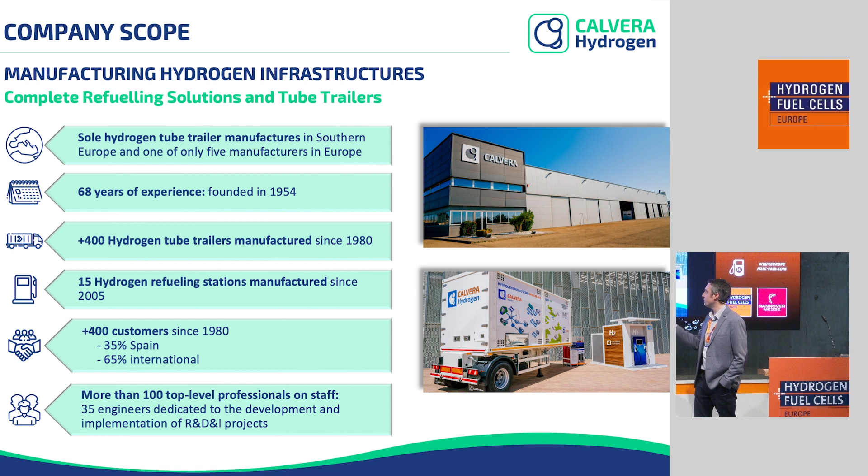I will speak about hydrogen refueling stations after. In Calvera, quality and safety are very important, and we've got engineering teams - more than 35 engineers in Calvera to dimension, design, and build our equipment.

So let's start to speak about storage first. In Calvera, we work within a hydrogen hub - you've got the production and you've got the off-taker. In Calvera, we manufacture equipment just after the production. Once the hydrogen molecule is manufactured and produced, we manufacture equipment to store, transport, and distribute hydrogen. Regarding storage, we manufacture racks, blocks, and bundles for stationary storage, in vertical or horizontal configurations.

In the market, we manufacture storage at 200 bar, 300 bar, 500 bar, 900 bar. These are, let's say, standard pressures, because we can also offer 350 bar, 700 bar, whatever you want. But there are common pressures on the market like 200, 300, 500, and 900 bar.

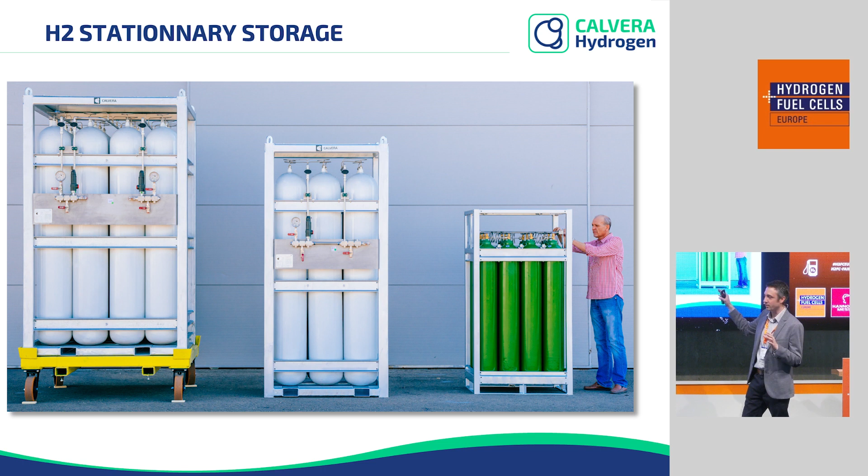So we manufacture on a vertical way - when you see vertical cylinders, it's because you need less footprint and you only need a small capacity of storage, so we use the vertical position. But when you need more capacity to be stored, we will use a horizontal way to store the hydrogen, with big cylinders or tube cylinders. It can be containerized, but usually the storage is not containerized - you can see it outside, in a frame.

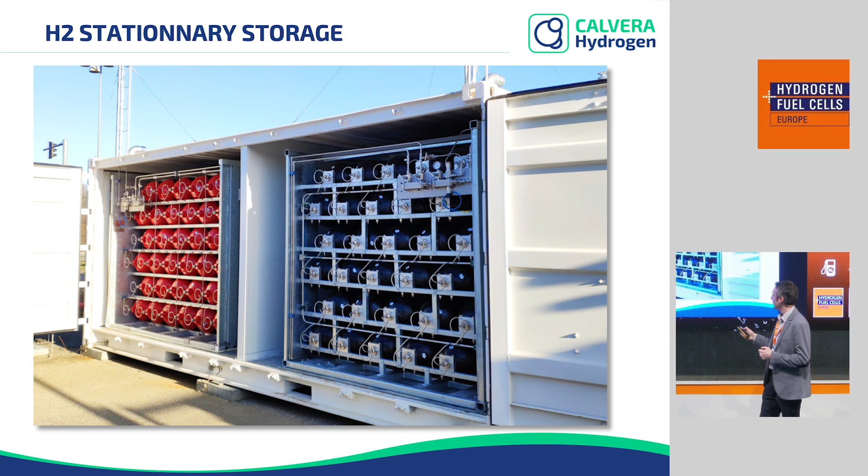So this is about storage. Let's speak about transport. There are many equipments to transport hydrogen. You've got bundles at 200 bar, 300 bar, 450 bar. Usually you will find more 200 bar bundles on the market, but we can manufacture with these three working pressures. The bundle is mainly used for industrial markets, when you need to transport very little hydrogen - for example, between 5 kilo and 18 kilo, you will use a bundle to transport it.

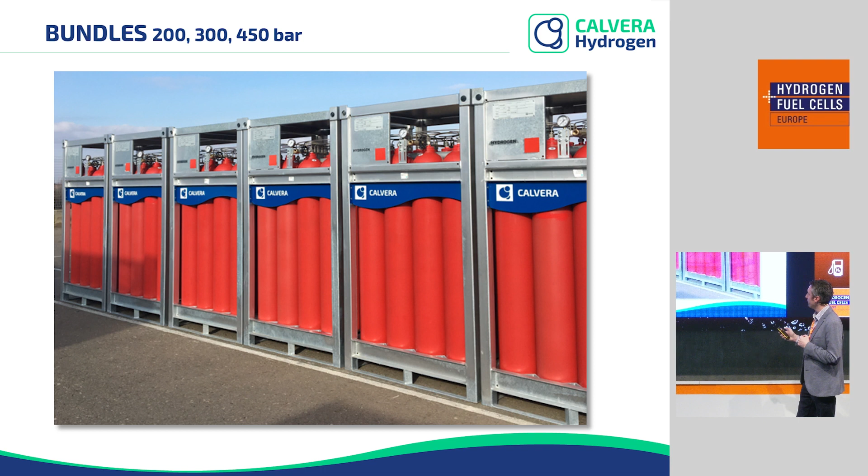If you want to transport much more capacity, you will use tube trailers, mobile containers, or battery vehicles and so on. So we manufacture 200 bar tube trailers. The thing is, nowadays the market doesn't ask us for 200 bar tube trailers anymore. Main gas companies - Air Liquide, Linde, Praxair - still have a fleet of 200 bar tube trailers because they've used them for decades, so they've got many tube trailers.

The thing is now, everybody is asking for much more working pressure. So 200 bar, let's say, is more the past for us now. The market has totally swapped to 300 bar at least. So nowadays we only have demand at 300 bar or 380 bar, but not 200 bar anymore, except in 1 or 2 countries outside of Europe.

So when you need to transport at 300 bar, in our case it won't be with a tube trailer anymore, but with a container. Why? Because on the tube trailer, for 200 bar it's okay - you've got different types of cylinders on the market: type 1, steel cylinders; type 2, steel cylinders wrapped with carbon fiber; and type 3, type 4, composite cylinders. So for decades, we've used steel cylinders to transport hydrogen.

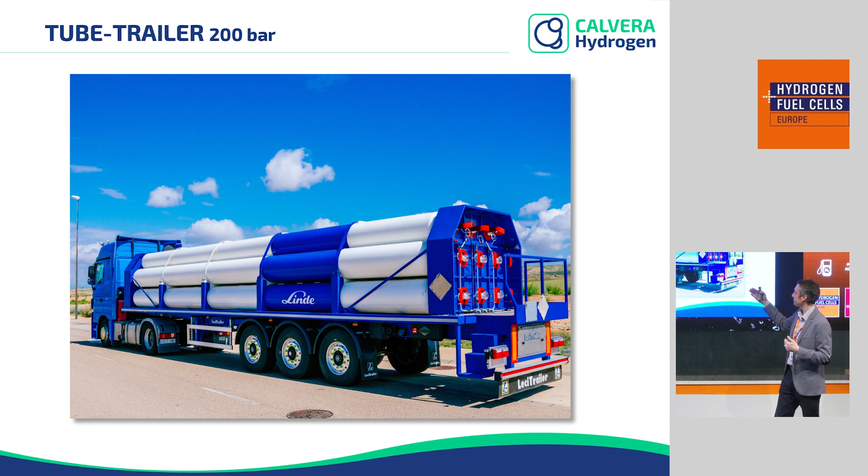Until 200 bar, it's okay, but if you want to transport with more pressure, you will need to add thickness to the steel tube. If you increase the thickness, you increase the weight. As you increase the weight, you will overpass the maximum weight allowed for road transport - over 40 tons in Germany, over 44 tons in France or Belgium, or 40 in Spain, etc. So when you need to transport with more pressure, we will do it directly with containers, because we use lighter cylinders.

So in Calvera, for mobile container, we use 2 types of cylinders. Well, in fact there is a third one, but we mainly use type 2 cylinders and type 4 cylinders. Sometimes we use type 3.

We use type 3 to transport with highest pressure, but I will explain it after, quickly. So actually, in Calvera, we propose type 2 cylinders. This is a steel cylinder wrapped with composite. Compared with type 1 cylinders, you reduce the thickness of the steel, so you put carbon fiber, which allows you to resist the pressure.

So we manufacture a mobile container at 300 bar, 380 bar. At 300 bar, we use type 2 and type 4 cylinders. But at 380 bar, we use type 4 cylinders, so composite cylinders. And when we want to manufacture a 450 bar container, we use type 3 cylinders. With different types of cylinders, maybe it's a mess, sorry. And for the California market, we use type 4 cylinders at 517 bar, but it's especially for the US. In Europe, it will come.

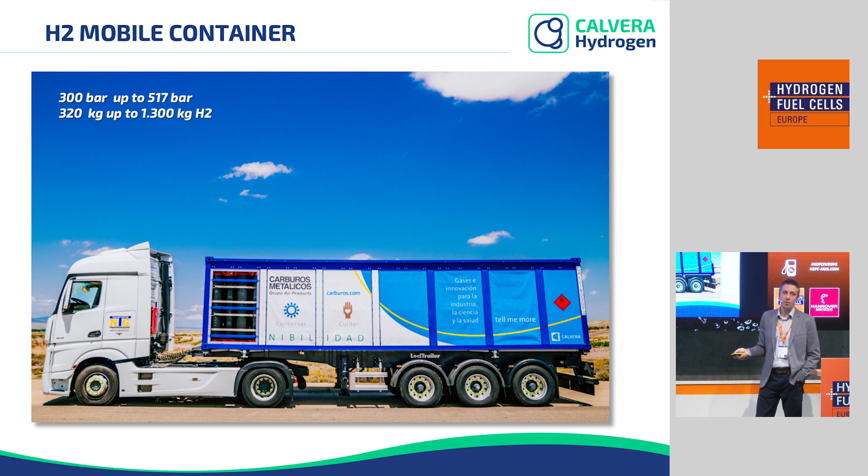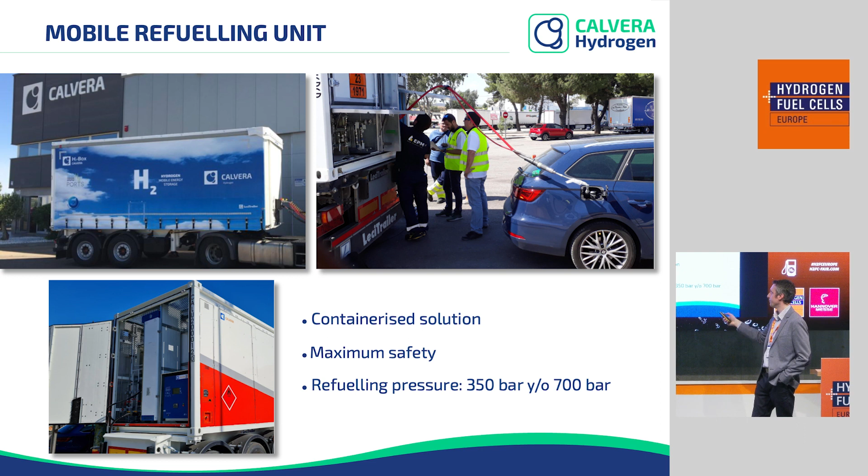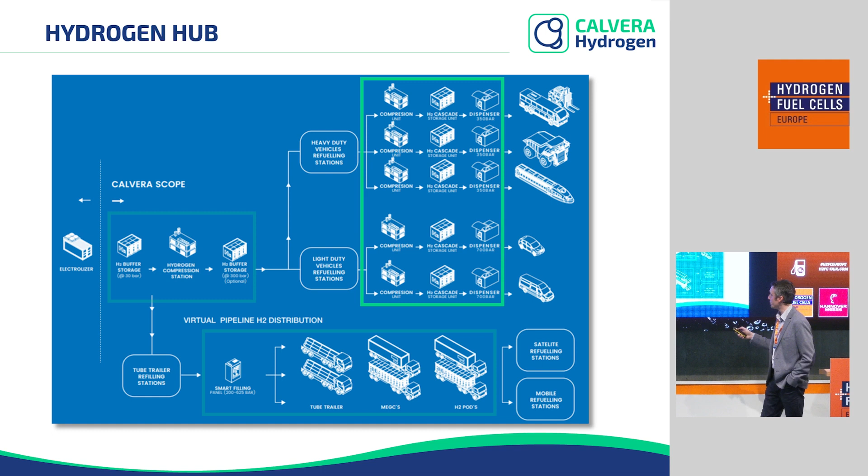And we also supply and manufacture mobile refueling stations or refueling units, without compressor or with compressor, to refill hydrogen vehicles. And the last point is the distribution. So after storage, transport, you've got the distribution.

In Calvera, we design and manufacture hydrogen refueling stations, at 350 bar but also at 700 bar, both of them. It can be stationary or transportable, we do both. It can be containerized or, let's say, industrial - when I say industrial, it's because you've got much more storage outside of containers. So in Calvera, we manufacture our own compressor station or high-pressure storage station, and we also manufacture the dispenser and PLC to control the whole plant.

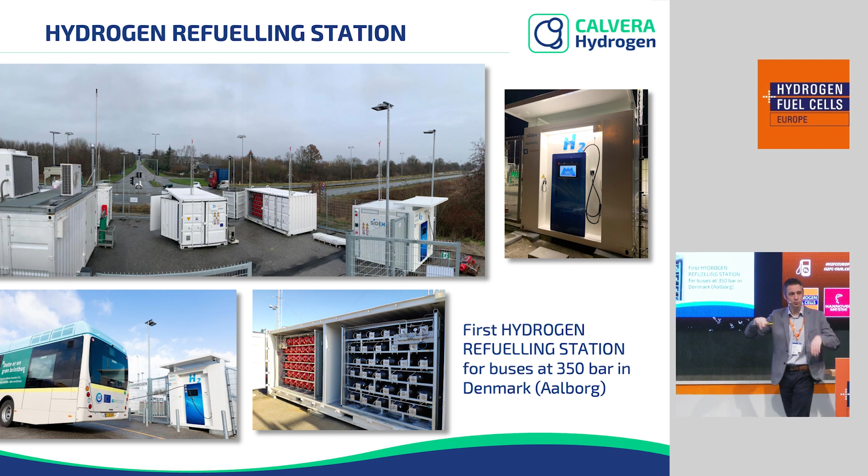This is a 350 bar hydrogen refueling station to fill buses, for example, trucks, vans, cars, vehicles at 350 bar. This is a 350 bar refueling station, the one in Aalborg. It was the first hydrogen refueling station for buses in Denmark.

And this is a hydrogen refueling station in Madrid at 700 bar for vehicles. Actually, Cabify is using it in Madrid. And we manufacture several hydrogen refueling stations, mainly in Europe, in Chile too, but mainly in Europe.

And to finish the presentation, just quickly, just to speak about the project. It's an old project now, more than 5, 7 years old now, but it's a big hit project, very good. It was the first one in Europe with European funding, and you've got the full hydrogen hub here. So it's a very good project.

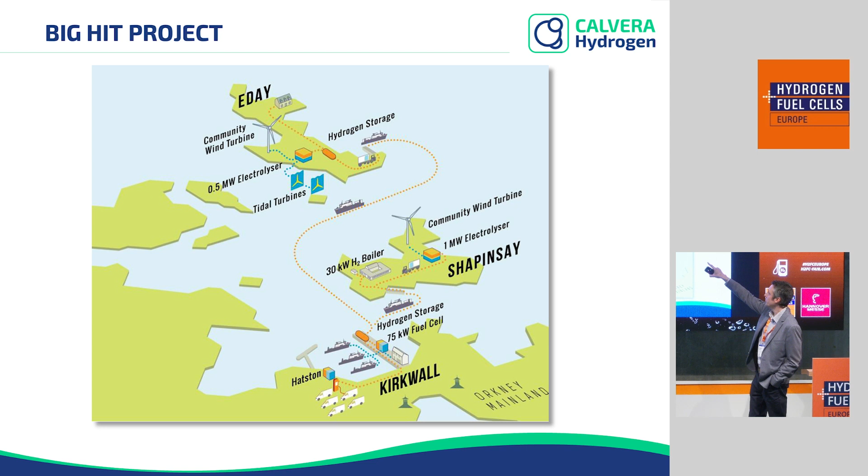It was the first one in Scotland, in the Orkney Islands. So you produce hydrogen with wind generators on 2 islands. You've got the compressor station, and after you have to compress the hydrogen produced, and fill the mobile container. Then you transport the mobile container from the island to the main port, Kirkwall, and they use the hydrogen to fill a ferry with electricity and also to fill cars.

And well, that's it. I don't know, okay, 1 minute, I don't know. Thank you. I don't know if you've got questions maybe, or it's after. No question? Yes, one question. They are going to give you a microphone.

Do you have a methodology to assure the safety of your storage? According to what standards do you manufacture, what is your working methodology to be safe?

Yeah, so it's true, when we manufacture it, we respect European regulation, but you have to add more safety devices, let's say. For mobile containers, we have a TPRD, which is a device in case of increase of temperature - the capsule inside blows out and the hydrogen can escape by the upper part. So yes, we add devices. We can add pneumatic valves, you can control at a distance the filling of the storage or the loading or unloading. So yeah, we already add safety devices. For us, it's very important.